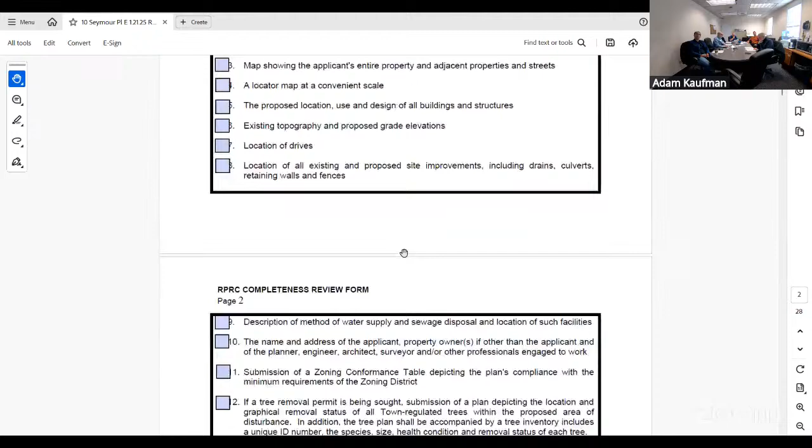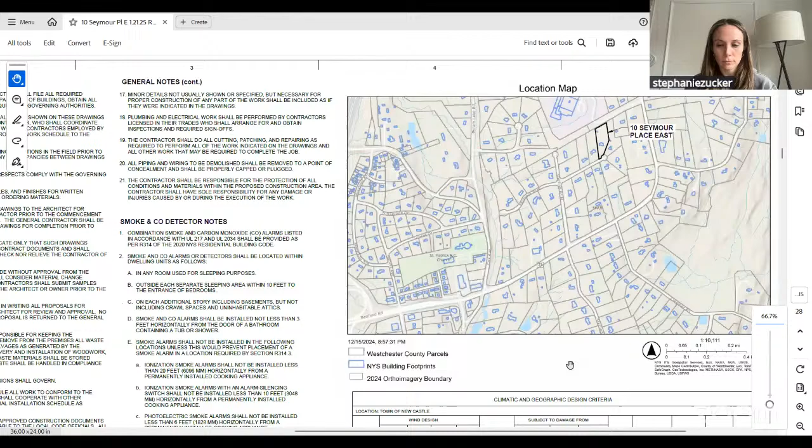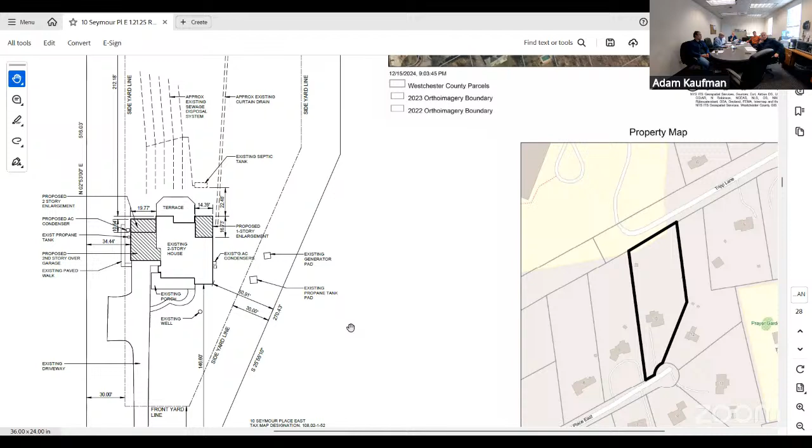Okay, so that's what it ends up looking like in plan view. You can see the proposed additions on the site plan. They're hatched with a diagonal. Yeah. And Stephanie, I met your husband out at the property and he said that Norman prepared new plans. So what changed from what we're looking at here? Yes, Norman could speak to it, but it's literally just 2 feet extending back on that addition. Oh God, I don't know exactly.

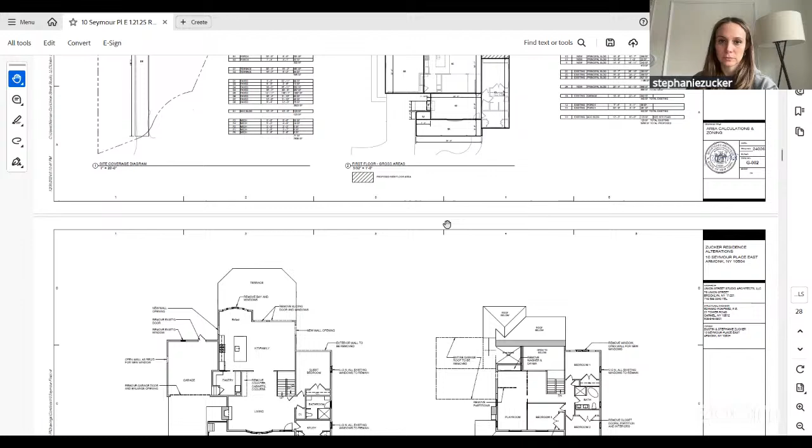Yeah. On the right-hand side, the den area is extended a little further than on the original submitted plans, a couple of feet. The reason for that is we originally were going to remove the existing rear wall of the house on the right side to do that extension, and then we decided that was a little too much construction work, leave that wall and just maintain the length of the den. Okay, so it's not going to change the elevation significantly. No, not really at all. All right, any questions, guys, on what's being proposed here?

Looks nice. Yeah, I think it looks nice. Yeah, well, it looks nice now because Galena did a lot of, you know Galena, our girl. She didn't change any of the roof line though. No, but it's new siding. Whatever she did interior from what it was.

I have very few comments. Health Department on the adequacy of the existing septic system. Should be fine. Norman has to revise the elevations to show building height and maximum exterior wall height, not a big deal. I think it complies, but it should be noted on there. Can I ask a question about that? We did update the elevation views to show heights. How do you prefer them to be shown? We show them either to the ridge line or to the top of the wall. Well, our code is average grade to the roof midpoint for building height. And then the- Got it.

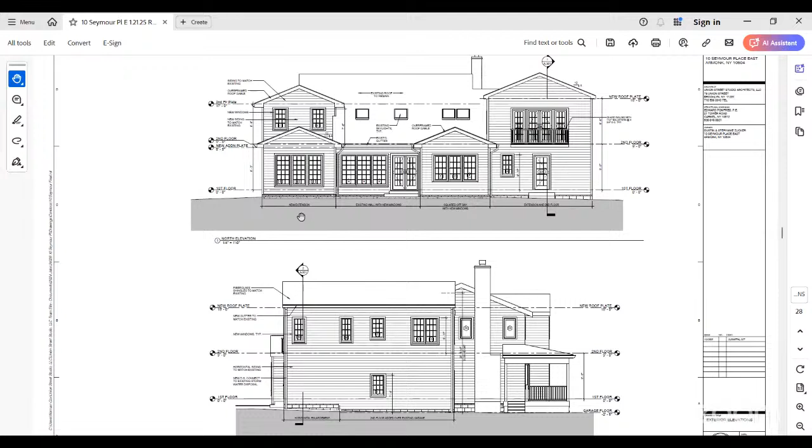Maximum exterior wall height calculation is lowest grade to roof midpoint. Got it. Okay. All right, any tree removal being proposed? No tree removal. Okay, I was going to ask, if there was tree removal, we have a one-to-one tree removal for planting. Exactly, yeah, but we won't have to worry about that.

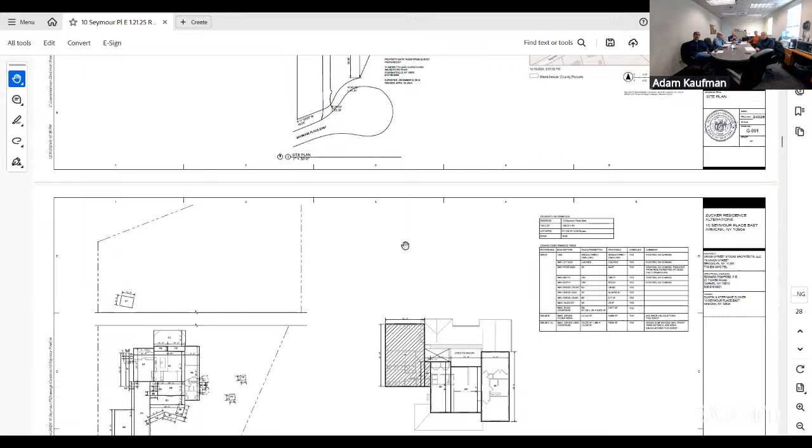Okay. Engineering issues? Stormwater, they're increasing the impervious surface, health department, as you mentioned. Okay. That's it? That was it. All right, so some technical details to address, but I don't think there's any reason to go to the planning board or the ARB on this one. So I'll make a motion to send this to building department. Second. All in favor? Aye.

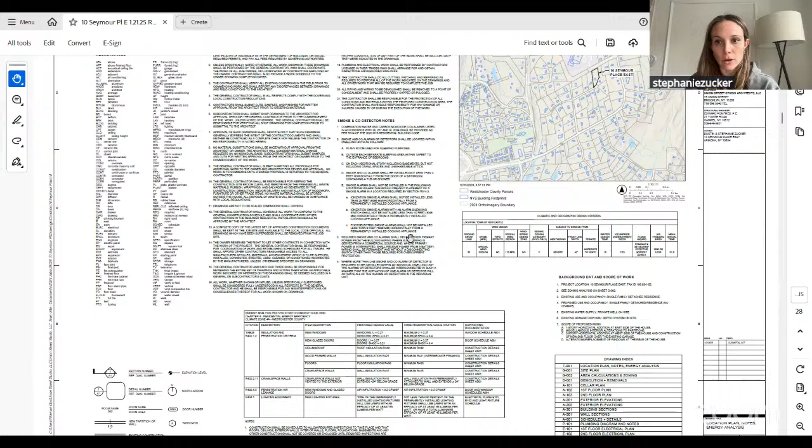All right, so we'll put together our comments that will need to be addressed before they issue the building permit, but the next step is to submit everything to the building department and the town engineer to move this along. Perfect. And will that be done on your end, or do we need to bring over our own set to the building department? No, you will need to submit the revised plans directly to building and to the town engineer. And we'll put together a list of the items that need to be addressed later today. Perfect. And we'll post that on the town website.

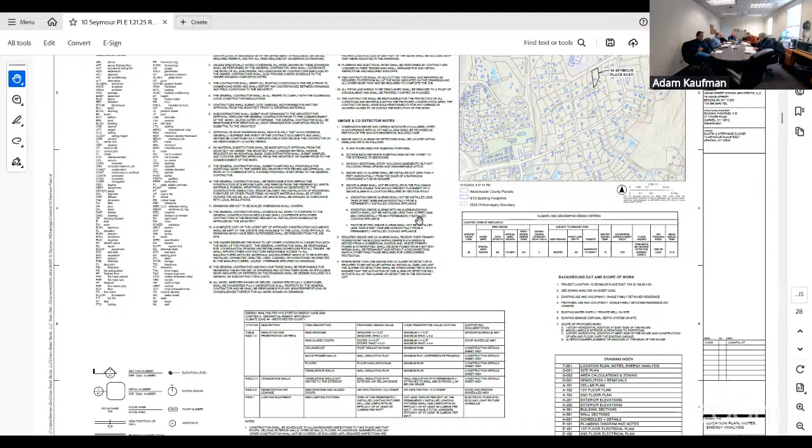And they should be fine with the septic, because I believe it was replaced. It was? It was, I think, not by Galena, but the previous owner. Yeah, I think it's just because of the determination, structures being added and stuff. Well, yeah, we'll have to see if it triggers their review or not. Correct, yeah, increasing. All right.

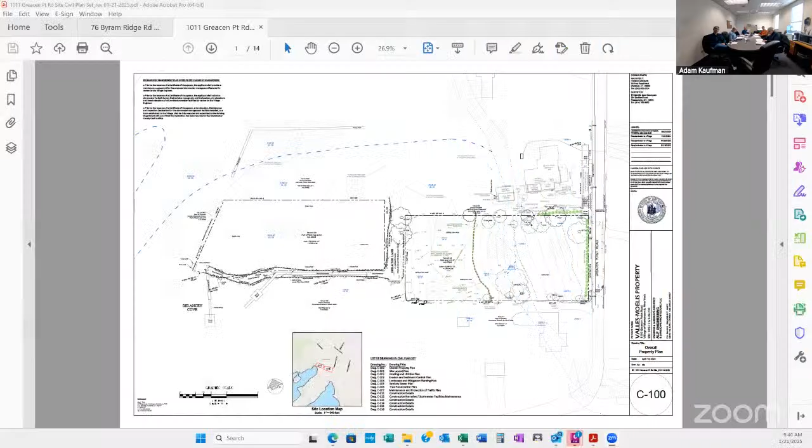So next is 76 Byram Ridge Road. Depends how Adam words it in the article, it says shall get the health department. Alan, are you here for 76 Byram? I am indeed. Okay, great. So I've got you and Teo here. Good morning. So can one of you bring up the plans and we'll go through it? I can bring up the site plans. Great. Whoops, wrong one. Sorry. Let's get the right one. Sorry about that. No problem, Al. There we go.

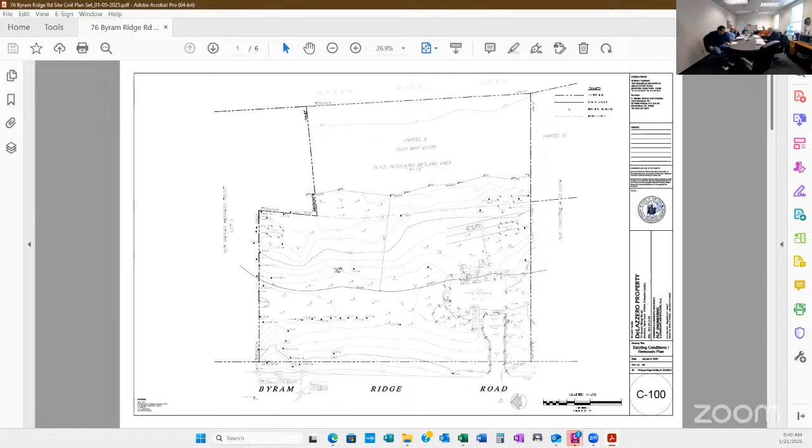So we're on Byram Ridge Road. We've got the state wetland and the lake in the back. Correct. There's a 100-foot buffer here. Existing house right outside that buffer. Correct. And then a nice, beautiful new plan that you guys are proposing, but definitely some wetland buffer disturbance. Correct. There is some wetland buffer disturbance, primarily the extension of the house here and over here. This is kind of like, well, not a sunroom, but a screen porch. And there's a deck back here being proposed, and the deck is elevated, so it's above ground, and that's it.

The septic remains basically as it was, so we need a new tank to put in. There's no increase in number of bedrooms, and the driveway obviously is very different. The existing driveway comes in through here, and the new driveway is located here. The design of the house is totally different. It uses the old foundation of the house, but the garage now is at a different level. Great, yeah, you're filling all that in.

Right, so Teo and Alan, I want to get your take on having the new driveway run parallel to Byram Ridge Road, so close to Byram Ridge Road. To me, that's a really strange scenario. You know what I mean? You're creating like a parallel road right there.

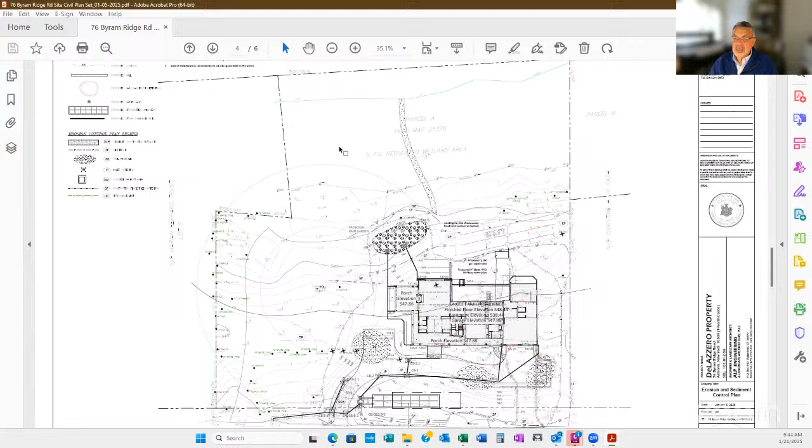One of my other comments is, how do we deal with the wetland mitigation plan and lawn right next to the wetland and those things? You didn't really address that yet. Yeah, right, rain garden. That's fine, but right now, this is actually kind of a brushy area here. So we're just showing a pathway down to the lake here. And yes, we'll have to develop some type of mitigation to this area, because right now it's kind of overgrown and uncared for. I don't know how else to describe it.

Alright. Yeah, I think we've got a good sense of the plan here. Teo, can you take over and show us the design of the house? Yes. Okay. Really is lovely. I mean, such a nice... Okay, so

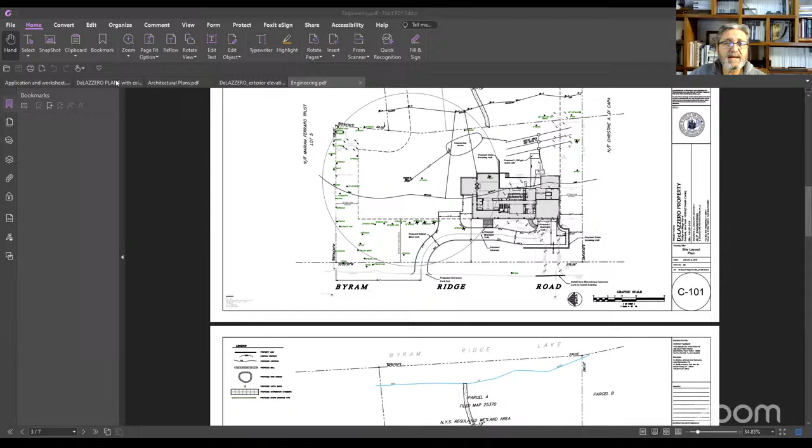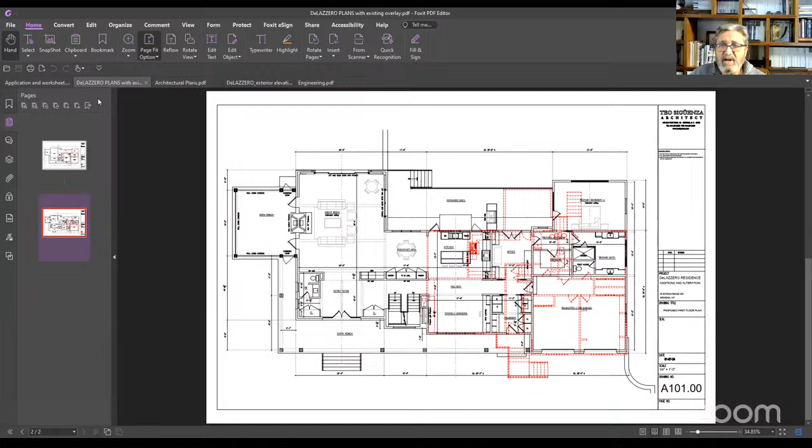Here is the overlay of the house, just to illustrate the existing and the proposed, the red being the existing and the expansion area. So we have a large porch in the entry. We have the guest access this way. We have the garage, and then I will jump to my architectural plan here. Can you see my screen? Yes.

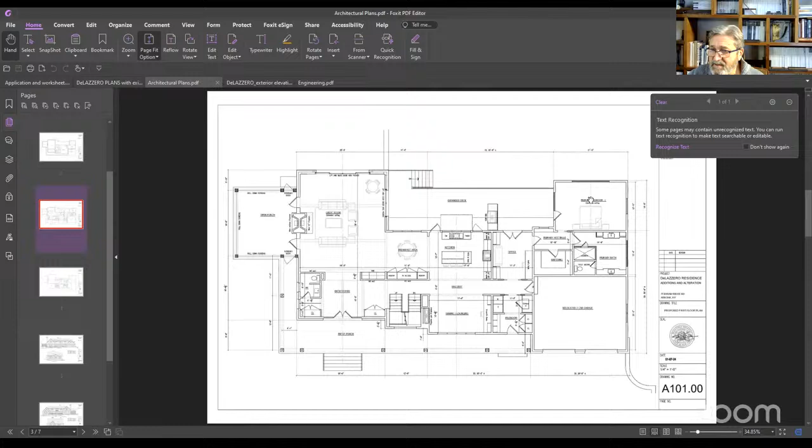I show the floor plan here. So the idea is to get the garage to the floor elevation. Our client has a physical difficulty in navigating stairs, so we're trying to get him as close as we can to the house, which is what creates the longer driveway that you were referring to. So we have the garage, mudroom in here. You can see terraces, decks in the back, family room, screen porch, kitchen and so forth. On the second floor, basically 2 bedrooms; on the first floor, 1 suite, 1 bedroom. So a total of 3 bedrooms.

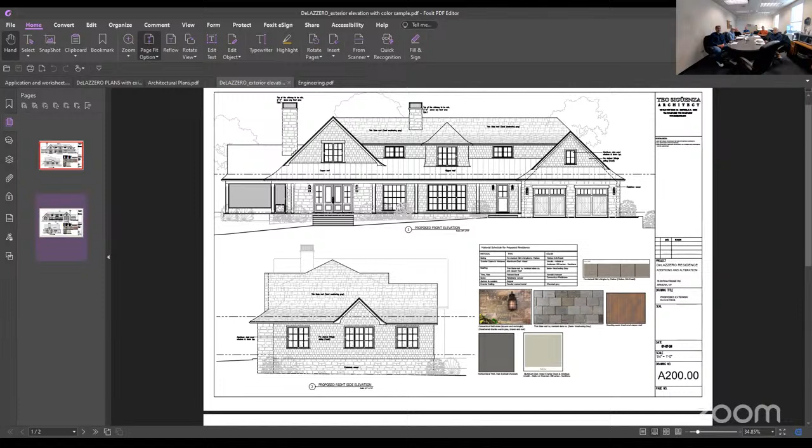Looks good. It looks beautiful. You said Mr. DeLazzero has mobility issues, right? Yes, he does. Right, so that's one of the reasons to try to bring the garage up. Yeah, no, I appreciate that. All right, so Alan, can we go back to your site plan? Or do you have it, Teo, there?

I'll let Alan actually go back to the site plan, but if you want, I can. No, it's all right. So we just need to discuss how we wanted to deal with this, right? I don't think it needs ARB approval. But there are a bunch of site issues we need to talk about, in particular what's happening in that wetland buffer, right? We've got the septic, rain garden, house. There's a lot happening back there.

What do you guys think? Gonna come to the CB. It definitely has to go to the conservation board, I agree. But what do you think, Steve? Should the planning board take a look at this too? Right, screening plan, I'd like to see all that stuff. Well, I yield to your expertise. However, how much is it gonna change through the planning board? In other words, I don't know yet.

I don't think it'll be a large task to get through the planning board, but it'd probably be objective to have it, to hear them out. Only because this is a dangerous precedent if we don't. That's my take. I think there's enough meat here for us to chew on. Do I think they're gonna have large issues? No. But I think it's pragmatic to do it, yes, on this one. I don't think it'll take very long, and I'm only speaking as 1 out of 5 people.

That's my take. All right, so I'll make a motion to send this to planning and conservation board. Second. All in favor? Aye. All right, so I think that's the best way to deal with this. It is a sensitive lot, guys, and we'll review it. Sounds good. Are there any recommendations that you board members have so that we can address that before?

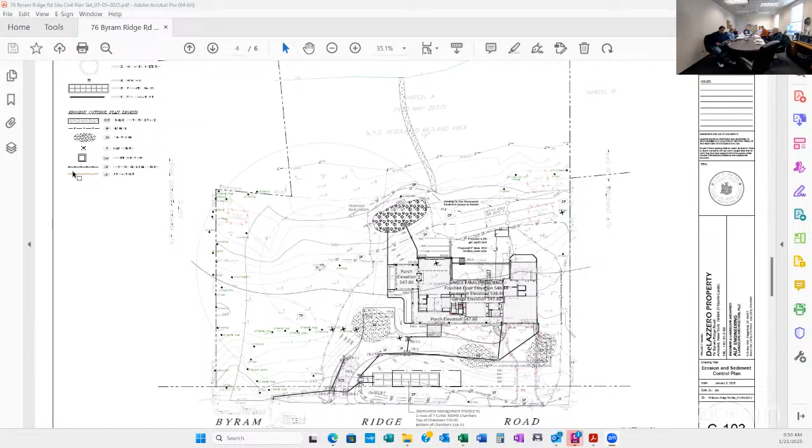I think it is quantifying the amount of disturbance, coming up with a preliminary mitigation plan, a screening plan, like what do you plan to do in that front yard, particularly between Byram Ridge Road and the driveway? Is it just gonna be lawn? Are you gonna put something in there? Yeah, sure. Something below, that type of stuff, I would suggest. Are we gonna have physical demarcations in the rear of what's gonna be maintained lawn versus naturalized area? That's the kind of stuff we need to focus on.

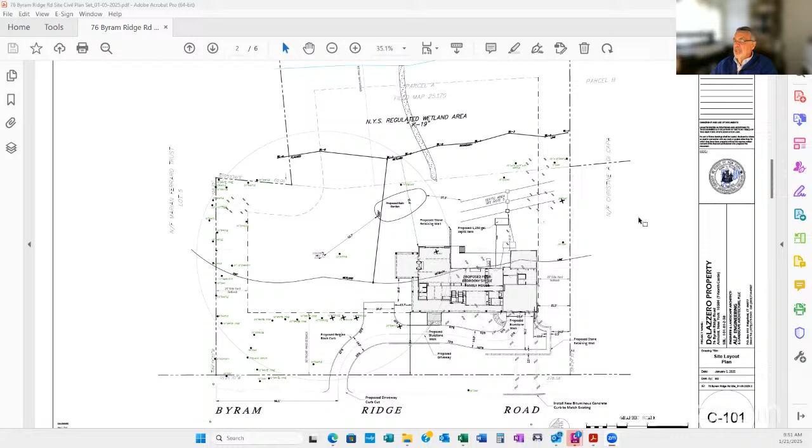Okay. And Alan, one thing, is there any possibility of having the septic system outside the wetland buffer? Can it be in that front yard somewhere? I think it's too close to that well. If you look at the 100-foot setback off the well, which is like here, it really covers virtually all of it. So it's really limited, unfortunately. Yeah, you'd have to be 200 feet from it. Well, we've got to go over all this stuff. The only way you could do that is to find another place for the well and see where it is in the Capwood's property, and then relocate it. That might make sense. Yeah.

But on the other hand, we will be creating a lot more disturbance. You know, the septic is there, 3 bedrooms, it works. Yeah, no, I get it. Well, this is the stuff we have to figure out, talk about. Yeah. Okay. All right, so get that in and we'll review it. Very good. Thank you very much.

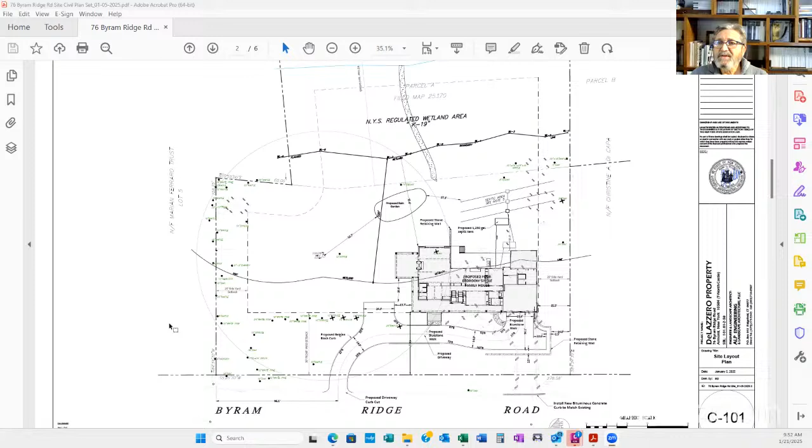Appreciate it. For the submission to the planning board and ARB, we don't need to attend? Yes. You know what, though? No, I take that back, because once you come to the planning board, you have to go to the ARB, but you won't have any issues there. Okay. Very good. We will do that. So could that application be done in tandem? Yes, absolutely. We could process them all concurrently.

Thank you. We'll take that step. Thank you, board members. Take care, Mr. Kaufman. Thank you very much. Appreciate it. Thank you. Bye-bye.

One more. This one's for a carport. All right, so this is One Smith Farm. Existing house. And so this is the driveway that comes in. This is all the backup area. Garages are on the side. A new carport is being proposed back here, just for storage. Looks fine. I don't really have any concerns about what it looks like. It's a simple covered structure. Everyone okay with this? Yeah.